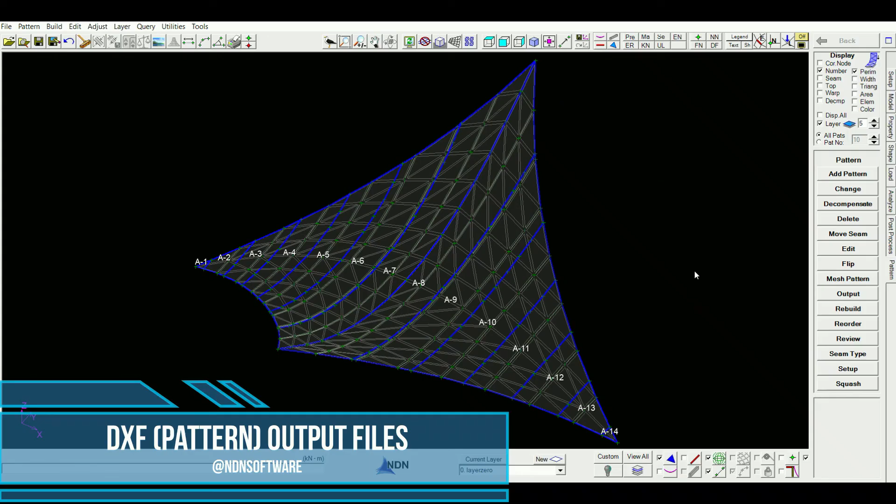Once we've reviewed our patterns and we have everything the way we want it, we can go in and create our DXF output files for our cut patterns. So I'm in the pattern environment and I'm going to come over and click on output.

Now let's give this information here a quick review before we click write, which will write out all of our patterns. So compensations: for this model, I haven't entered any compensations, but if you have, those values will display right here, so you can check and make sure those are what you want. And these patterns are also going to be flattened using the triangulation method, and that's because that is how we created these patterns.

Squashed: we can only squash these patterns if we created them by element, which is one of the add methods when you create patterns, and we just did not use that method for this model. So this is what I want, triangulate. And then you've got a bunch of other information here, like for example, closed corners. This is really handy. This will close the corners of all of your polylines. I always like to have that checked.

And then we come down and take a look at the actual files we're going to get. So I have this set up the way I want it right now. So we're going to get our cut patterns, and I'm going to have all of those in a single file. If you want, you can uncheck this and get each one of those in its own separate file. I don't need an exploded assembly. I'll leave that off. Uncompensated set, again, I didn't put any compensation in this, so I don't need that as well.

I'd like to take a look at a marking plan. I'll just show you what that looks like, so I have that checked. Then you can also get a text file or a summary file if you like. So then down here, we've got our pattern range. It automatically reads in all of my patterns, 1 through 14.

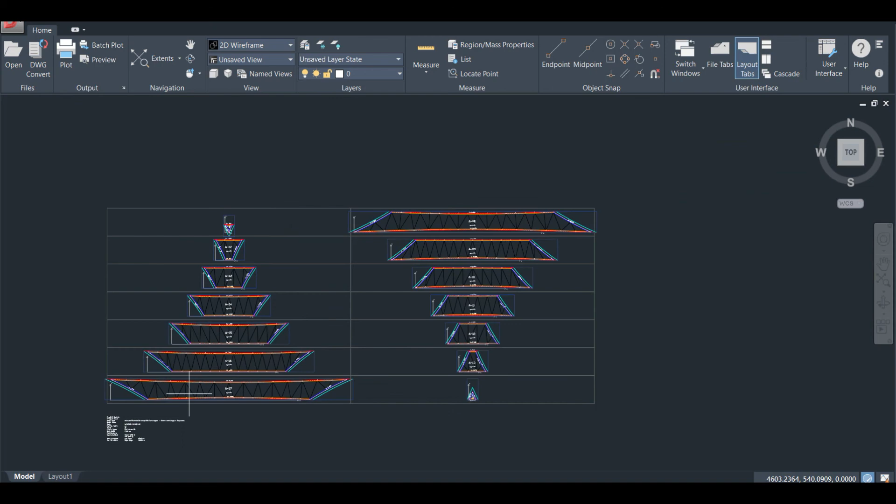Let's start with our cut patterns. And here's that file. I've got all of my cut patterns in one file just as I requested. If we zoom in on the bottom corner down here, you just get a table with some basic information, a quick summary of this file. Now let's take a closer look at one of these patterns just as an example. So you notice I have a bunch of information displayed here.

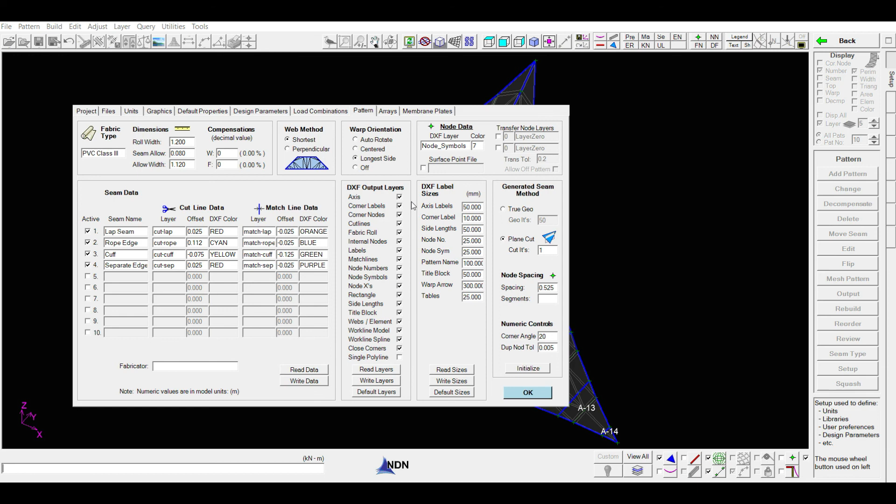And the reason that's so is because in NDN, when I went into my pattern setup for DXF output layers, I told NDN I want all of this information. So if your patterns look a little cluttered and you would like less information, just come in and turn off some of these boxes and either rewrite your output files or do this before you create your output files the next time around. Click OK. Go back to my files.

So let's zoom in here a little more. So I have everything displayed. I've got the lengths of my edges. I've got the polylines running around the perimeter of my patterns with the positive and negative offset for all of my seam types. I have displayed the 2D triangles used to create these patterns, as well as the warp orientation, the name of each pattern. Pretty much everything is here.

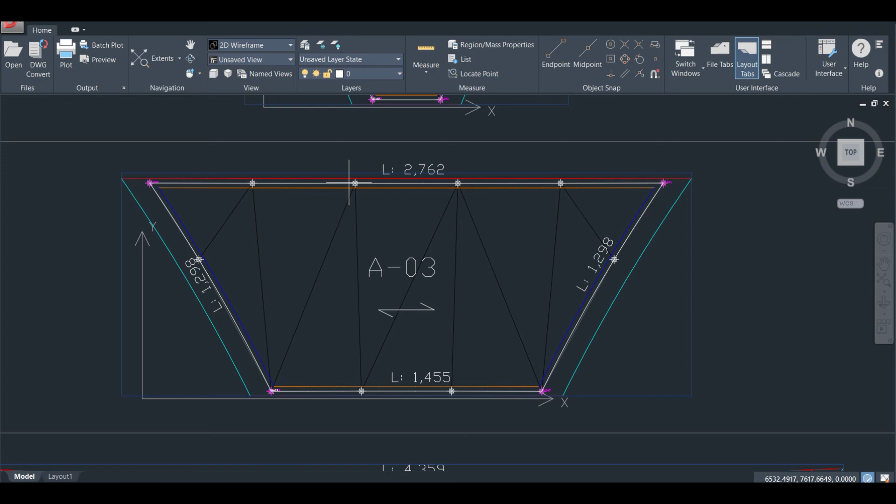I've got my corner nodes. I even have corner node numbers. So I have all of this information displayed. And if you want all of it here, just so you have it, make your settings in NDN exactly what I had, and then you can always come up in your layers over here and turn off any of these layers you don't want to see. So those are our cut patterns.

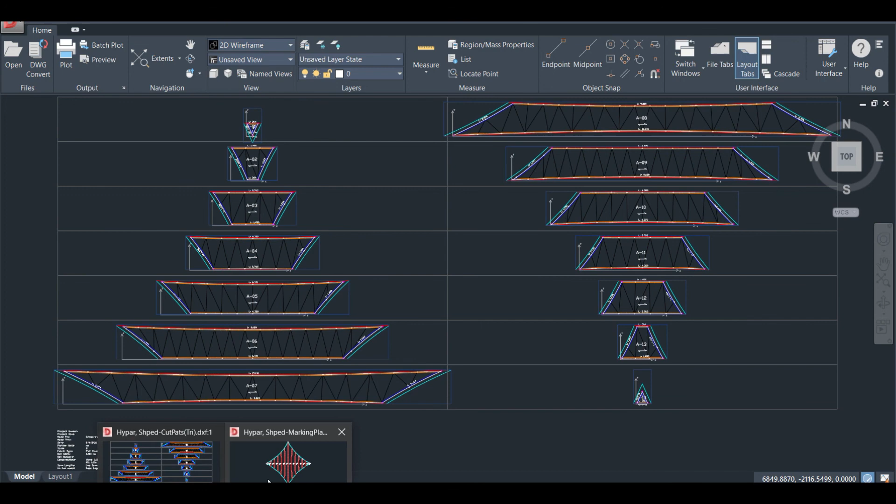Now let's jump over and take a quick look at the marking plan just to show you what that looks like. So a much simpler looking file. Again, if we zoom in down here, you've got a basic table with some information about the file. And then you just have your patterns laid out in order, just like they would be on the real structure in 3D. So it's something you can take a quick look at.

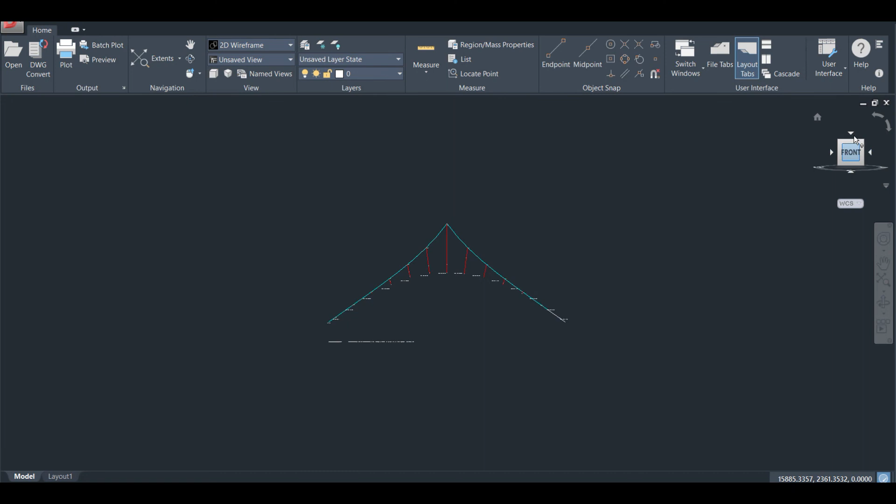Just a nice marking plan there for you to see what everything looks like. So that is the marking plan. We've gone over the DXF output cut patterns. These patterns can go ahead and be cut.